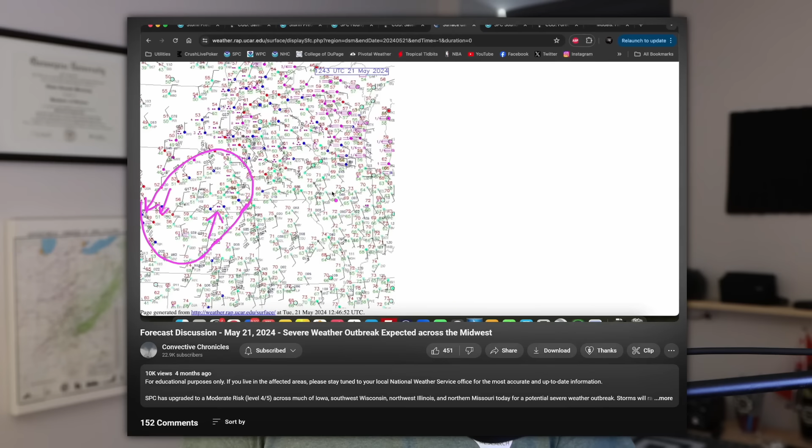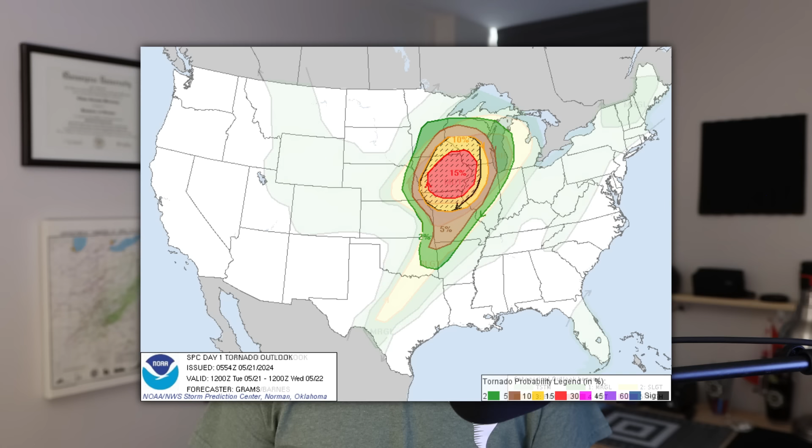However, it is important to note that the Storm Prediction Center did a great job forecasting this event. They implemented a moderate risk for severe weather, or a level 4 out of 5 for the region, driven by a 15% hatched probability for significant tornadoes. Ahead of the Greenfield, Iowa tornado, there were tornado watches in place, and the affected communities got advanced lead warning time tornado warnings.

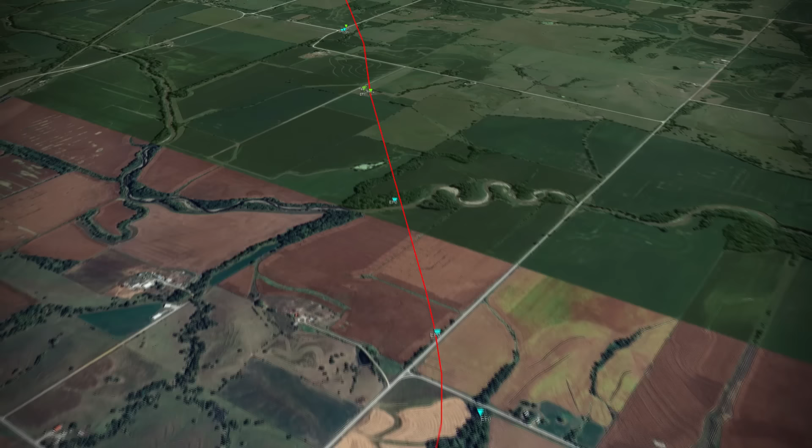To start off this damage analysis, we're going to get an overarching view of the tornado's path in order to get a quick summary of the tornado's life. The tornado touched down southwest of Nodaway, Iowa, while the Carbon, Iowa EF3 was occluding. The first several miles of this tornado produced low-end damage, with the first EF2 damage indicator occurring 14 miles into the tornado's life.

East of Carl, Iowa, the tornado would traverse through a wind farm, destroying multiple wind turbines, as well as several farmsteads along the way. The first EF4 damage instance would be 3 miles north of the town of Williamson, Iowa, in the form of a family residence.

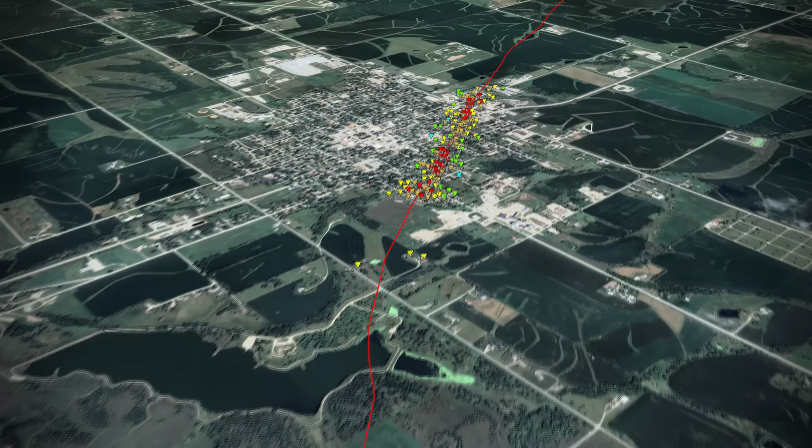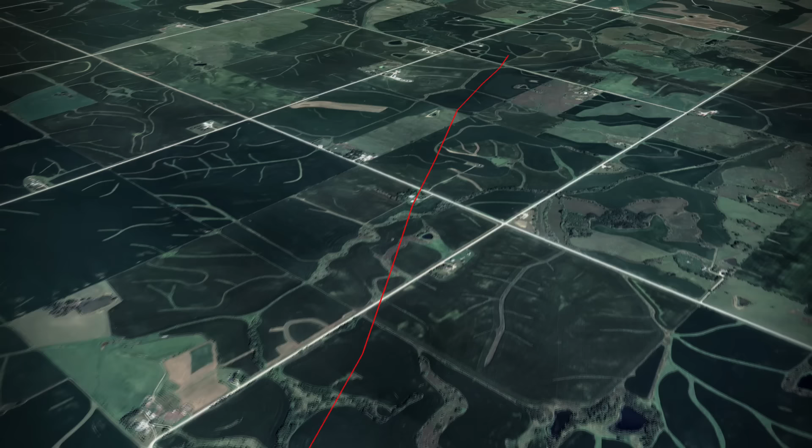Towards the end of the tornado's life, it would jog from its north-northeast original course into a northeasterly course, impacting the town of Greenfield. It would avoid the downtown part of town to the south, but there were still multiple residences in the path as well as small businesses, causing the bulk of the damage associated with this storm. The tornado would ultimately rope out just 3 miles past the town line of Greenfield.

I think it is important to note that the majority of this tornado's damage occurred at the end of the tornado's life while it was beginning to occlude. This is clear because the tornado had rapidly shrunk in width and deviated from the parent storm's motion. With that decrease in width, we have a conservation of angular momentum, where because of the shrinking diameter, the winds ultimately had to spin faster in order to conserve that angular momentum.

The first subject of this damage analysis is going to be the wind turbines that were ultimately impacted by this tornado, as I think they are a fascinating case to look at in terms of some interesting failure modes. This image here is one of the turbines that had ultimately been taken down by the tornado. Most of them failed in this fashion, and we're going to dive into exactly what type of failure this is.

Essentially, what ultimately happened is, as the tornado was traversing through this wind turbine farm, it was pushing over these wind turbines. But what ultimately failed in order to push these things over? As we can see at the base of the wind turbine here, it wasn't an anchoring failure.

Otherwise, the anchor bolts that are very beefy in the case of wind turbines, just because of the daily loads that these things need to take, those remained intact. But if we look further up, we notice a couple of breaking points within the tower of the wind turbine, and these are a result of a buckling failure.

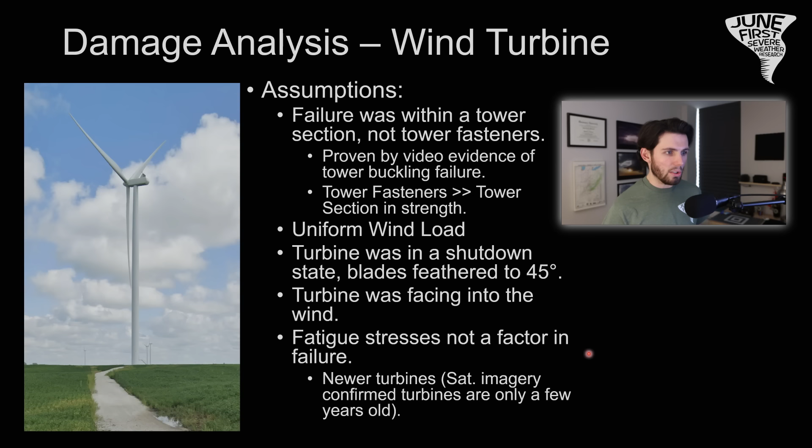And we're also going to assume that fatigue stresses were not already a factor in the failure. These are newer turbines based on satellite imagery, some of them only being a couple years old. So fatigue stresses are something that occur across the life of the turbine. And because these are such newer turbines, very early into their lifespan, they haven't had the constant wind loading of day-to-day use that would ultimately contribute to fatigue stresses, weakening them in the long run. So fatigue stresses are not going to be considered in this analysis.

Now, here are the geometries that we are going to need for this analysis. So we're going to have a lot of the different geometries of the tower itself, as well as some of the distances. So for example, the height of the hub, the length of the blades, width of the blades. All of these parameters are important in order to get the geometries correct to put them into our drag equations as well as our sum of moments equations. I was able to get the weight of the turbine from the data sheet as well as some of the material information of the tower support. Since the failure was within the tower itself, it was important to get the material properties of that tower in order to analyze its failure.

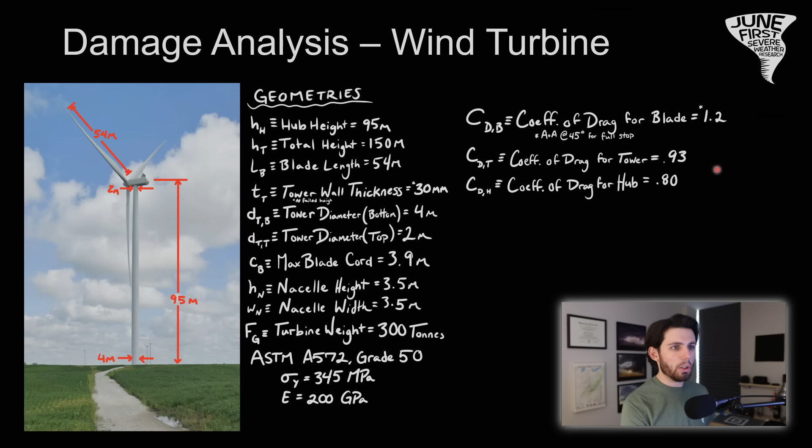Additionally, we got coefficients of drag for the different aspects of this wind turbine. So you have the hub drag coefficient, the drag of the tower itself, and then the drag coefficient of the blades. So how these turbines work is they have feathered blades. So depending on what is needed for power output, they feather the blades based on wind speed in order to get the max power output out of those turbines. And eventually when the wind speeds become too great for the turbine itself, you have to shut down the turbine to keep the turbine from basically exploding.

So what they do is the blades feather to a point where they can no longer produce lift. And when they do that, they produce a lot more drag. So even though the wind speeds are a lot higher beyond the operating parameters of the turbine itself, there's still a lot of drag being pushed on those turbine blades.

So that's why the coefficient of drag is so high on each of those turbine blades. Here are all of our forces on the turbine. So we have wind loads on each of the blades, as well as the tower and the hub. And then of course the weight weighing down on it and our reactionary forces at the base.

So ultimately what we can do here is create a resultant vector, because we're going to average out these three blade heights and just say that they're acting into the hub. So we'll have the three wind forces combined going into that 95 meter height in terms of our input into our moment equation.

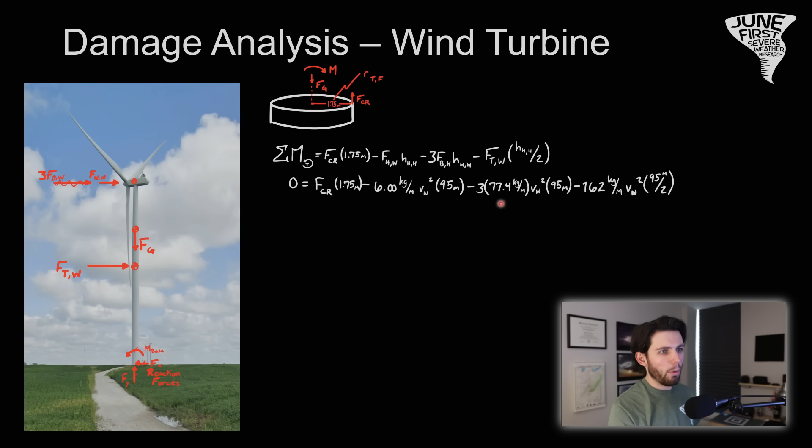But nonetheless, we have all of these terms filled out here, but we need to solve for that buckling force, right? So what we can do is use Euler's buckling equation, which accounts for the shape of the cross-section and how good it is at reducing the risk of a buckling failure. That's what this I term is. Then we have E, which is our modulus of elasticity, so basically the material property and how good it is at resisting those compressive loads.

Then we have a K factor here, which is basically the buckling end condition. Depending on how each end of our rod is constrained, you're going to have a different K factor. In the case of a turbine, you have an anchored end on one side, and the other end is free to move, which effectively doubles the effective length of the buckling condition. If it's pinned on either end, you only have the length of the column to work with, whereas if you have a little bit of flexibility at the top, you effectively double that length.

So we plug in all of our values here since we know all of that. Granted, the data sheets had everything in metric, so the calculations here are going to be in metric, but I'll convert it in the end to miles per hour. So ultimately, our critical buckling force, the criteria we need to hit in order to result in a buckling failure of this tower, is 4,670 kilonewtons. That is a lot of force, but nonetheless, what we do now is plug that into our greater moment equation.

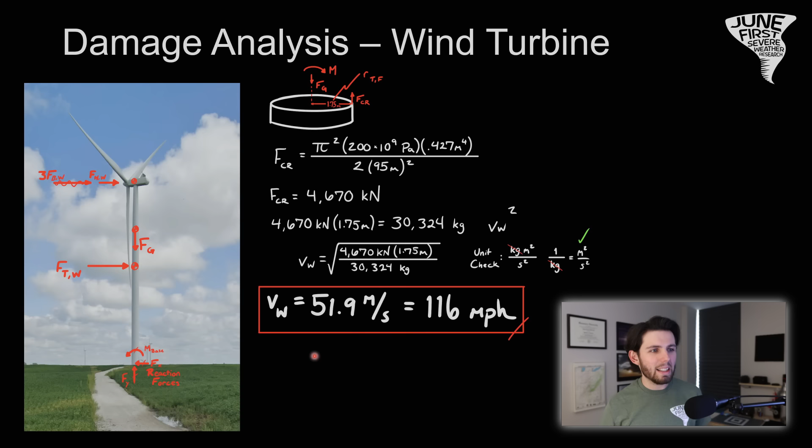This is very interesting because the ultimate final rating on these wind turbines was EF2 117 miles per hour. So it's kind of funny to see how scarily accurate we can get with a couple of hand calculations at the end of the day. Granted, we can get into much more depth when it comes to how these towers fail if we use something like an FEA software, or a finite element analysis software, where we basically plug this geometry into a giant supercomputer and make a bunch of little elements and see how all the stresses behave at different points in the structure. But that requires some very heavy computational power that I don't unfortunately have access to.

With that said, let's take a look at the sequence of failure events. So ultimately, the first failure is going to be a buckling failure in the middle of the turbine. So you basically get that compressive buckling failure on one side, and then as this thing starts swinging over, we get a secondary buckling failure closer to the base. So this bigger cross section, as this thing starts swinging over, there's going to be much more of a compressive load building up now as the moment arm keeps swinging further and further, and you have more leverage pushing down at the base of that column, and it results in that secondary buckling failure.

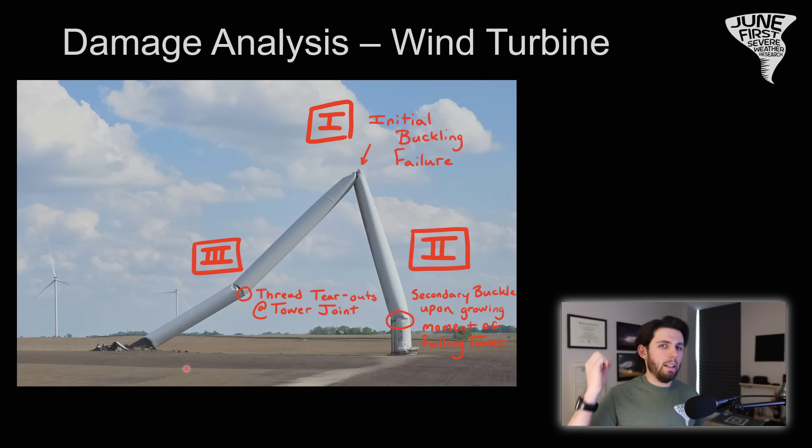And then finally here we have a thread tear out at the tower joint from when the turbine itself smashes into the ground. That big impact force is just going to shear all the threads out of the bolts in the joint of the two sections of the tower there. So very interesting combined failure here. And if you haven't seen the video from Reed Timmer of these towers falling over, you can actually see the sequence of events where they fail in the middle first, they buckle at the bottom, and then finally the turbine smashes into the ground and causes that final column section separation.

This next damage analysis subject was submitted to me on Twitter. I had asked people if there were specific things that they wanted me to look at when it comes to the Greenfield, Iowa tornado, and this is one of the ones that came up. This was from a garage on the southern edge of the core of the tornado as it was coming through Greenfield. It is a 2-post car lift garage, and what happened here is basically a concrete tear out from the concrete base of where this 2-post car lift was anchored into.

And granted, there were probably a lot of debris impacts here, and we're going to talk about that in the assumptions in a second, but I thought it would be really interesting to see, assuming debris wasn't the primary factor of failure, what wind speed would be needed in order to cause this thing to pull out of the ground? Here we have our assumptions. So for this analysis, we're assuming that there were no significant debris impacts. There likely were, given that there is a dent here in the joist cross member. However, there isn't a big sign of there being an impact on either of these columns, and nothing in terms of a paint transfer or anything like that up above that leads me to believe that something super significant hit this thing in order to pull it out of the ground. Given how uniformly it's pulled out of the ground, I think that wind load is a big contributing factor that ultimately caused the pullout failure of this car lift.

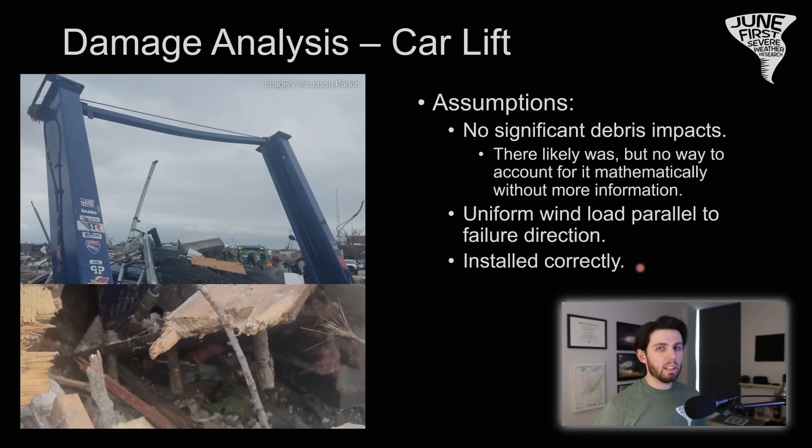And this thing could be significantly weaker if the concrete wasn't poured properly or this thing wasn't anchored into the concrete properly. There's a lot of things that go into that, as we'll get into in a second. Fortunately, I was able to find a user manual for this car lift and ultimately pull out a bunch of information in terms of geometries and the installation practices for this car lift. So that makes my job a heck of a lot easier in terms of not having to eyeball or guesstimate any of the dimensions here. We know exactly what's going on here and exactly how this thing was affixed into the ground.

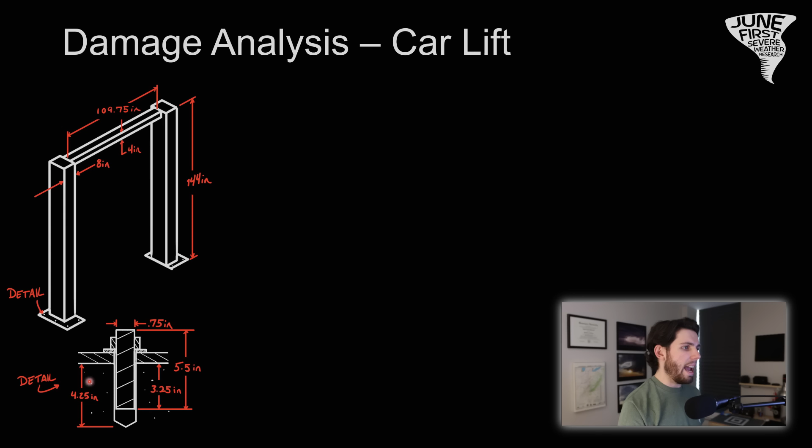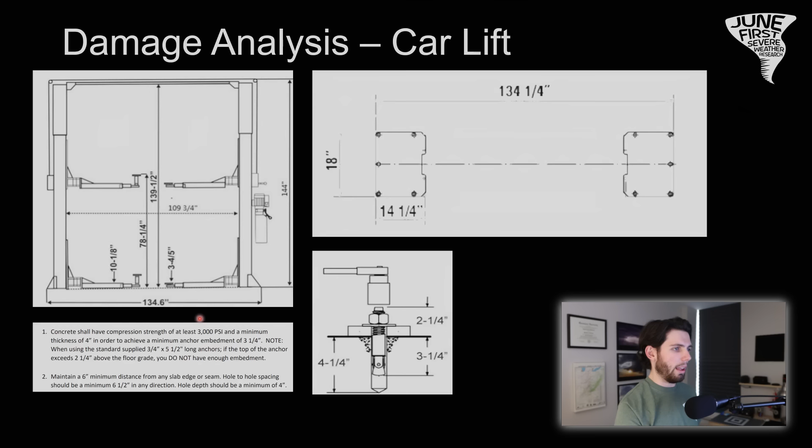So as we start adding our geometries and details in terms of the anchoring into the ground here, all of this stuff is extremely important. We can kind of nail home our geometries in terms of all of the widths and lengths in terms of moment arms, as well as all of the bolt engagement and distances needed in order to calculate how the failure occurred out of the concrete, including the material property of the concrete compressive strength of 3000 psi, which in the installation directions here, it said that the concrete base shall have a compression strength of at least 3000 psi and a thickness of 4 inches in order to have the proper installation depth and proper adherence to the standards in order to have this car lift safely used.

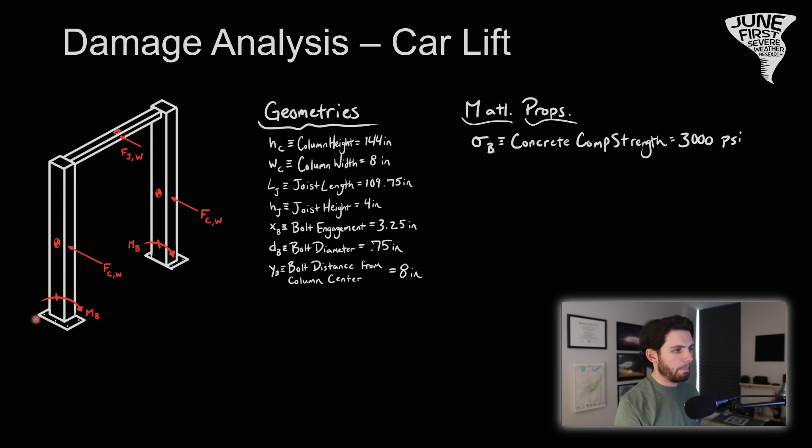So here are some of our forces at play. We're going to have each of the wind forces on the center of these columns, as well as on the center of the joist here that goes across connecting the two columns. And then we have the reactionary moments that the bolts are resisting against the wind loading. Here we are taking a look at concrete pullout, which is the main failure here ultimately that results in this car lift getting pushed over.

Concrete fails in a very interesting fashion. It's not like steel or any of these other traditional, more uniform style metal materials. Concrete is very good in compression, but very bad in tension and shear. And in the case of these concrete pullouts, we're looking at axial tensile failures of the concrete. And it doesn't fail in a straight line out. What ultimately happens is you get something called a fracture cone. So starting at the base of the anchoring point, you basically get a cone coming out of the fracture location. So as you pull axially on your anchoring bolt, the concrete is going to chip out in this kind of cone fashion outward.

Given the way concrete fails, we have special force equations to use in order to determine the concrete pullout failure. Ultimately, because the tensile load is so much weaker than the compressive load, we have to use this reduction factor with the square root of the compressive load failure to get an accurate representation of the strength in tension. Obviously, it is a much weaker number than that of the compressive load.

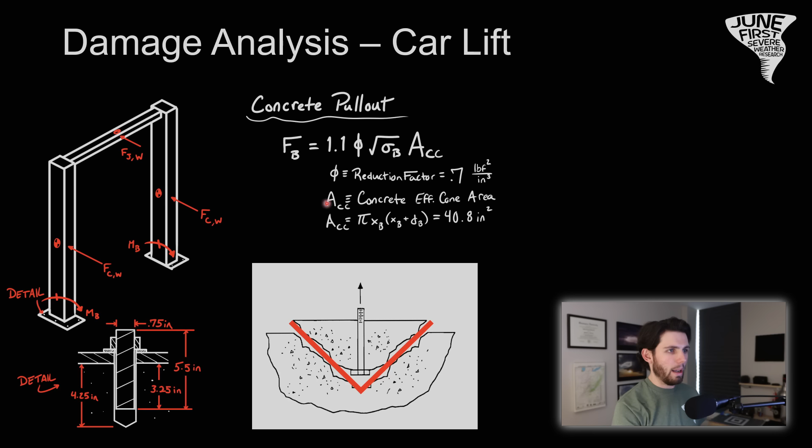Then we have the concrete effective cone area. So this is the amount of area that that cone is having to deal with that load. Basically, as stresses are distributed through the cone before failure, this is the effective area that the concrete has to work with in order to distribute that load as you're axially pulling on it. And then we solve for that effective area here within the equation.

If we take our bolt failure criteria and plug it into our sum of the moments equation, we ultimately have the two moments of the bases. So that's this 2MB term here. And then we have the moments from the two columns, from the wind forces on those two columns, and this center joist. So ultimately, if we look at the equation as a whole, we have the force of the wind on the two columns, so 2 times F times halfway up the column. So that's our moment arm there.

Then we have the central joist up here, which is the full height of the car lift, and then that force of drag from that central joist. And then we have finally our two moments about the bases of the column, which basically comprise the 5 bolts on each of the columns, the failure criteria of each of those bolts, and then the distance from the center of each of those columns.

So that gives you the moment arms on those ends that ultimately comprise this final bending moment equation. As we dive into it, like the wind turbine problem, we can solve for everything except for the velocity of the wind for both the column and the joist that goes across here. We have all of those terms available to us, the coefficient of drag, the density of air, the planform area that the wind sees, and we get these two terms just with V unknown.

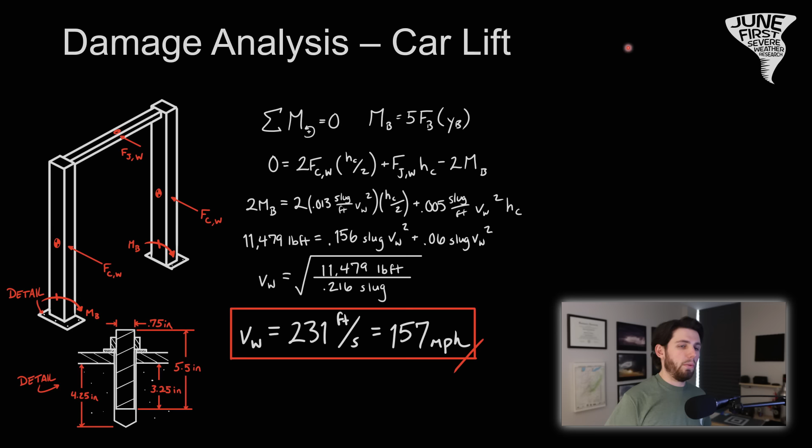We plug all of this information into our bending moments equation and start to isolate for V. We know all the terms except for V, so once again, we solve everything out, and assuming a purely wind-driven failure on this car lift, it would take a wind speed of 157 miles per hour in order to have concrete failures of those anchor bolts.

Like I said earlier, I do believe debris is a contributing factor in the failure here, and I think it's important that we note that this probably wasn't a perfect installation. There's a lot of things that have to go right in order to have a perfect installation into concrete. Granted, there's a lot of safety factors that go into play to ensure that even if there are some steps missed or the curing process wasn't perfect, the lift isn't going to fail catastrophically,

given that this is such an important piece of equipment to have very strict safety standards around, given that there are going to be people underneath heavy cars, and if that thing collapses, there are going to be people killed. So it's important to note that this thing is over-engineered to a point where it shouldn't fail. But nonetheless, one of the main things that sticks out to me is that there is no concrete really remaining on each of the anchor bolts.

That's likely because this was installed well after the concrete pad was poured, which is standard practice. You use a drill to drill out the concrete, and then you put in these anchor bolts and torque them down on top, and they bite into the concrete from the bottom. So I don't think there really should be concrete on those anchor bolts,

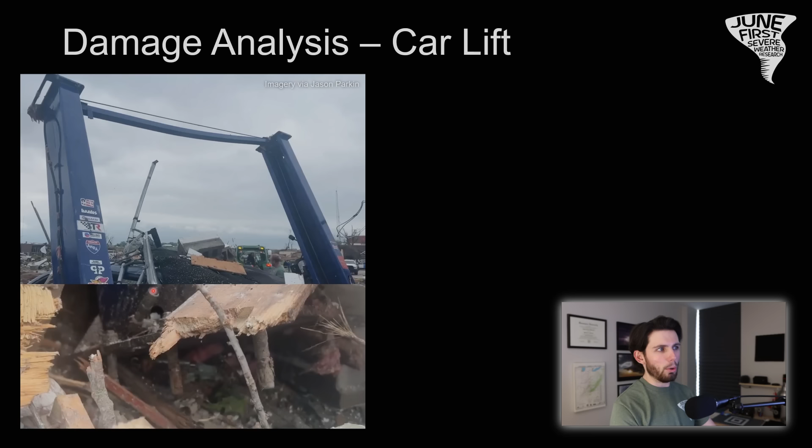but I think I would see a little bit more residue of some sort on these anchor bolts if there was a more permanent adherence to these bolts. And so something tells me that given the debris factor and the fact that there's no concrete on the bolts, this probably failed in less wind speed than what was calculated.

This next thing that we're going to analyze is a personal favorite of mine. This is something that we have seen before with other tornadoes, but this is the first time I've gotten the opportunity to really dive into one on a damage analysis stream. This one was submitted to me once again on Twitter, and this is a manhole that was sucked out of its hole in the path of the tornado.

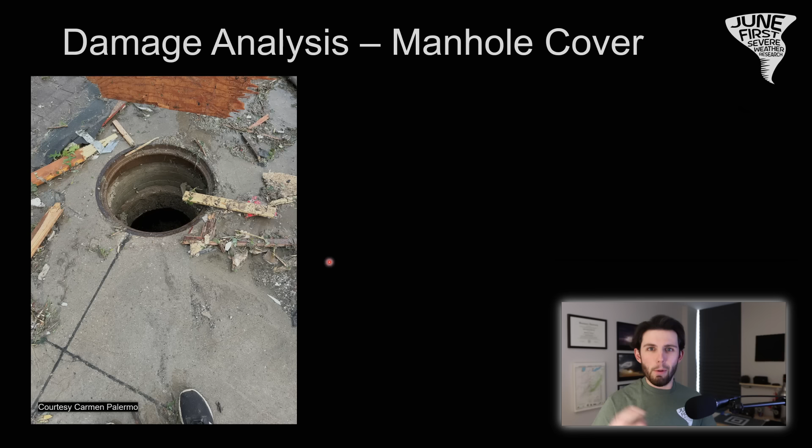This is a great illustrator of what is called Bernoulli's principle. Bernoulli's principle states that there is a relationship between a fluid's speed, pressure, as well as its potential energy. And in the case of this manhole cover, if you have a velocity increase on one side, you must have a pressure drop as well.

As we dive into it here, this is a 2-foot manhole cover with a 2-inch depth. So ultimately, what we can do with Bernoulli's here is get that final velocity based on the other knowns that we have. So within the sewer itself, there is no wind.

It's a velocity of 0. And ultimately, there are two forces at play. Because of the pressure differential of the speed of the wind on top, you're going to ultimately get a lifting force from the wind. And beneath it, you obviously have the weight due to gravity.

Here we have a number of terms that we need in order to solve for the weight and the wind force that is acting upon the cover here. So these three terms are important in order to get the weight of the cover. So we have the density of cast iron. These manhole covers are made from cast iron. Very heavy manhole covers. Obviously, they have to stay in the street and they can't come out. So that's why they're really heavy.

Then we have the gravitational acceleration constant, g, 32.2 feet per second squared. And then, of course, the volume of the cover, which we can get from just a simple cylindrical volume formula and the geometries that we already have at play. Then, of course, we have the area exposed to the wind, which is simply just the area of a circle. So we have to set our weight equal to the force of the uplift from the wind. We do that via the weight of our manhole cover, which we get ultimately to be 232 pounds force.

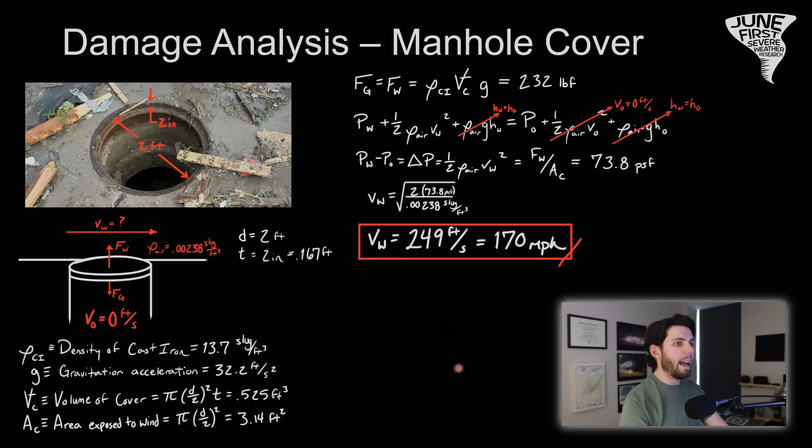And because we know that pressure differential, we can set that equal to our force due to the wind over the exposed area of the manhole cover, because at the end of the day, pressure is just force over area. And we plug in that weight as well as that area to get 73.8 pounds per square foot. So that is the pressure that needs to happen on that manhole cover in order to achieve that equilibrium. So we ultimately only have one variable left over that we need to solve for, which is that wind velocity. And when we do that, we get 249 feet per second, which comes out to 170 miles per hour.

The most important thing to note with this analysis here is that that wind speed is only what is needed to achieve equilibrium. So to get your force of the wind pulling it out equal to the force of the weight pulling it back down into the hole. So once you achieve that equilibrium, this thing is effectively neutrally balanced. You have to go faster than 170 miles per hour in order to create a force imbalance, in order to accelerate the manhole cover out of the hole.

The last thing we're going to look at for today's damage analysis is extremely intriguing to me, and I think goes to show just how powerful the wind speeds can be extremely low to the ground when it comes to the impacts of a subvortex or a very tightly wrapped core of a tornado. These are some parking stops in a parking lot that is across the street from an emergency room in Greenfield, Iowa. An important thing to note about this parking lot is that it is extremely new. It was built within the past year based on satellite imagery.

The most recent Google Earth satellite imagery up close for Greenfield, Iowa was in August of 2023, and this parking lot did not exist then. So at the time of this tornado, this parking lot was only a couple of months old at the most. As we take a look at these parking stops, they all exhibit a similar failure, whether it be one of the anchor points or both of the anchor points.

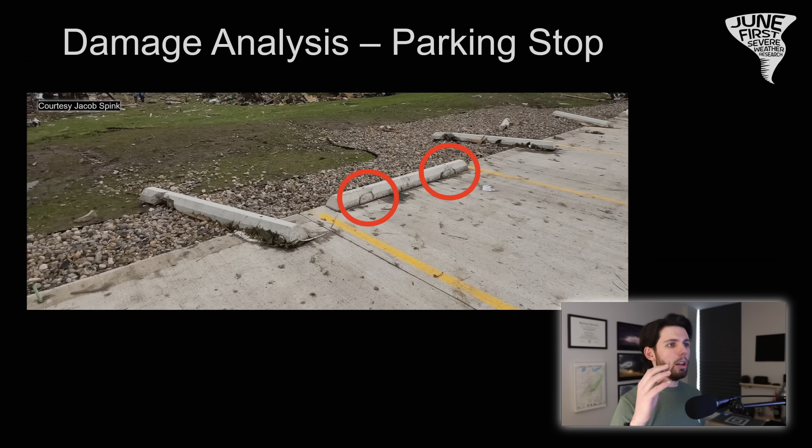Granted, debris impacts could be a case here, but because it occurred across all of these parking barriers almost uniformly, it makes me believe that it's a uniform wind load. If there was a debris impact, I think the failure of these parking stops would be much more catastrophic, and you would see almost smashed concrete barriers versus just simple tear-outs from their anchorings. You would see the thing smashed in half, smashed at the ends, XYZ, but you wouldn't see perfect tear-outs across all of these parking barriers.

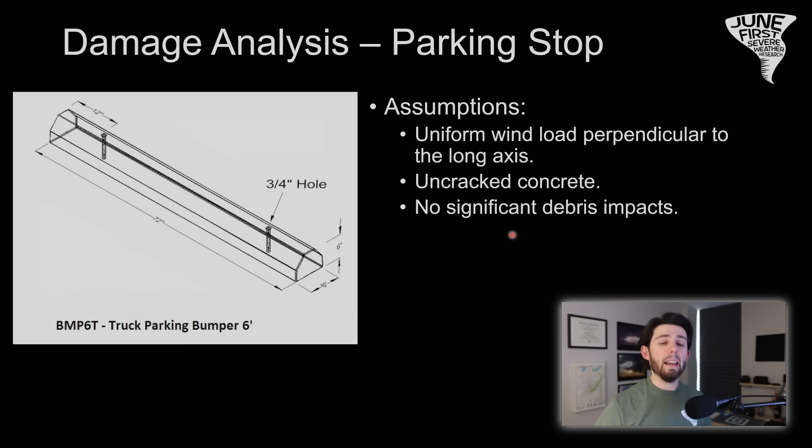So let's get into some of the assumptions. This is going to be assuming a uniform wind load perpendicular to the long axis, so it's going to be directly impacting the face of this parking stop. This is going to be treated as uncracked concrete, given the fact that they were so new and that there were no significant debris impacts based on the imagery provided. Here are our geometries as well as our concrete compressive strength again. And then this is our free body diagram, diagramming out our forces at play.

So obviously the big external force here is going to be the force due to the wind, but we also have a static friction force. Given this thing is sitting on the ground, there are a couple of anchors embedded into this thing, but at the same time, friction is still a factor that we need to consider. Just because it's anchored doesn't mean friction is not playing a role here. So we have that friction force combating it. We have the weight due to gravity of this thing, which is important to know for the friction force. And then we have the two, what we're calling tear out forces, because we ultimately know that's where the failure is going to be. Those are going to be the opposing forces via those two parking anchors.

We're going to be looking at this purely in the X direction, as those are the important dimensions at play in order to analyze this failure. So we have the force due to the wind, the two anchors, as well as the friction force. So the force of the wind is directly combating the two anchors and that friction force. Solving for the friction force, that's pretty simple. You just have your coefficient of static friction as well as the normal force, which in this case happens to be just the weight of this concrete parking stop.

The coefficient of static friction for the case of concrete on concrete is 0.8, and like I said, the normal force is just equal to our weight force. So we were able to get the weight of this concrete barrier from the data sheet, and it ultimately comes out to a friction force of 152 pounds force.

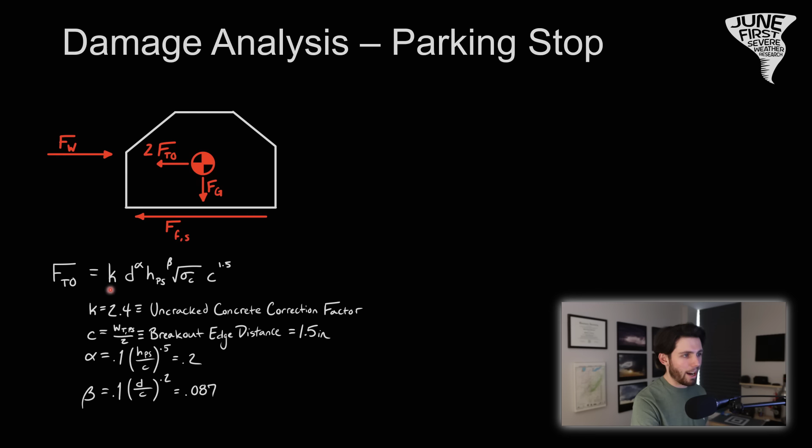So we solve for V, and we get a final answer of 414 feet per second, or 283 miles per hour. Now that is a very fast wind speed that sounds almost a little too unrealistic if you ask me. But if we go back into our equations again, let's look here. We have our K factor here, which is our uncracked concrete correction factor. So like I said at the beginning, this is assuming that this is an uncracked concrete condition.

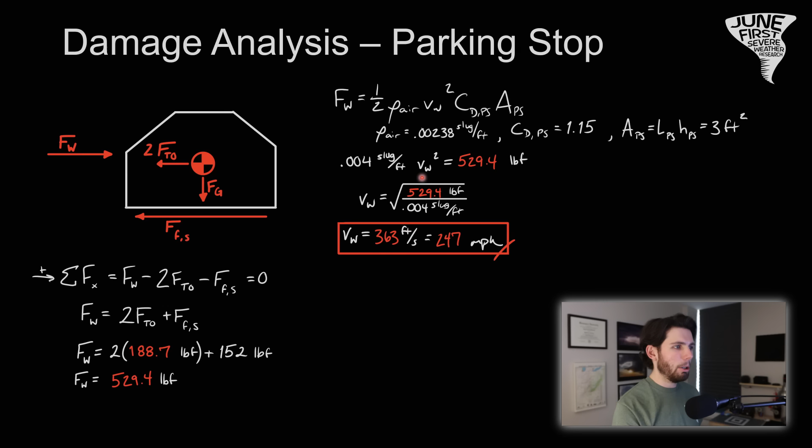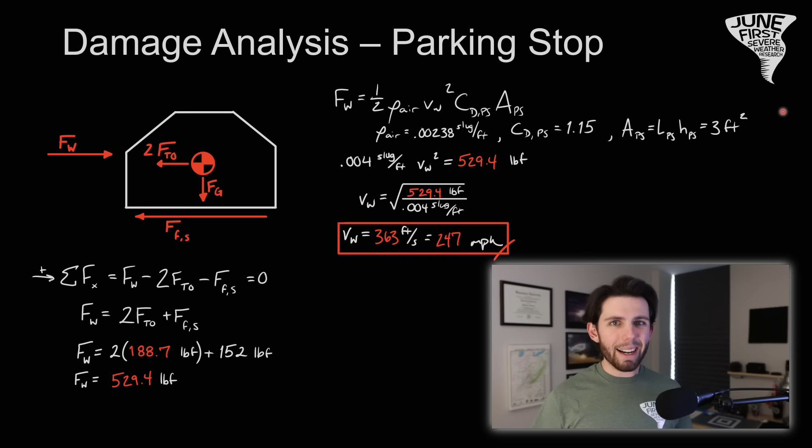Granted, there's another K factor we can use here. Instead, we can change that to a cracked concrete correction factor of 1.7, so slightly less, making the concrete even weaker than it already is. So if we plug that in, our tear out force comes down to 188.7 pounds force. We redo our equations again in the sum of forces in the X direction, as well as solving for V here, and we get 363 feet per second, or 247 miles per hour. So nonetheless, cracked concrete or uncracked concrete, this is an extremely fast wind speed.

Now, there are a number of things to consider here. There could be potential debris impacts that are further weakening it. There are inconsistencies in the concrete, allowing it to be weaker in general. But nonetheless, the fact that these tear-outs occurred universally across all of these parking barriers is extremely interesting to me, and it leads me to believe that there were wind speeds across all of these barriers here that were capable of doing this. If it was an isolated case, if it was just one parking barrier, then I could chalk it up to something like a debris impact. But in this case here, we can see 5 in a row parking barriers that all exhibited a concrete tear-out failure. This is kind of a smoking gun for me.

And if we zoom out real quick, things get even weirder, and it's hard to wrap your head around because tornadic debris damage analysis is so chaotic and it breaks conventional thinking sometimes. And that's what makes forensic tornado engineering so difficult, is that there are so many factors that contribute, and some of the things that we see are just so beyond our current understanding that it almost breaks our mind. Let's zoom out real quick with some drone footage.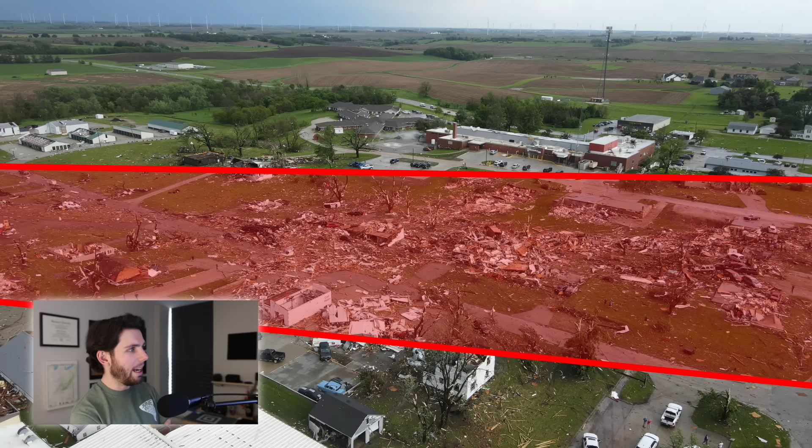Thanks to Chris Riske of High Risk Chris, he had some drone footage from right after the tornado and captured the parking lot in question in the footage. The main thing that I noticed is the gradient of the damage is extremely sharp, which leads me to believe that this was some serious vorticity stretching occurring at the end of this tornado's life, dramatically reducing the width of the tornado and increasing the velocity thanks to the conservation of angular momentum that we talked about earlier. But let's note some of the vehicles remaining in the parking lot.

If there are 200 plus mile per hour winds here, you would think that these vehicles would be lofted. But if we look just west of the parking lot, we see that we have an exploded house, this one over here earning an EF4 damage indicator thanks to its great construction. But nonetheless, the vehicles that were impacted were isolated to this half of the parking lot here.

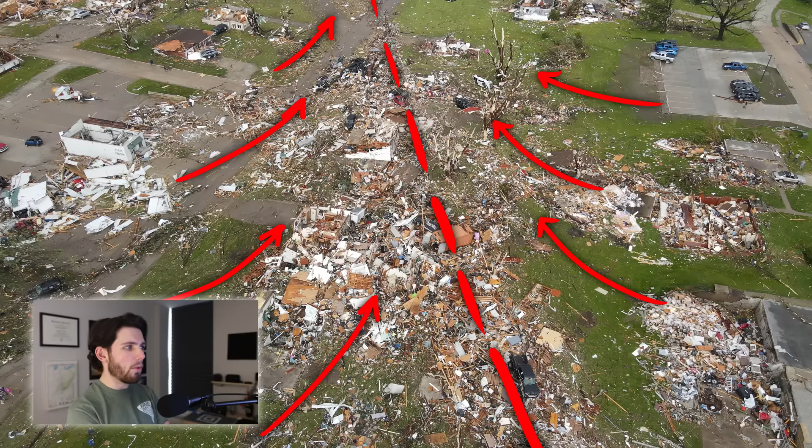Whereas if we look upstream a little bit, there are some randomly placed cars kind of in the backyards of the houses of the street to the north of this parking lot. While we cannot confirm that these cars came from the parking lot, I do think it's unusual that these vehicles are back over here if they had come from the street to the north here.

Now, the next thing you can point to are the rocks that are behind these concrete parking stops. And while most people might argue that those would be long gone if those types of wind speeds were exposed to this area, I think in this case, what happens is there is an extreme drag wake behind those parking stops that is shielding those rocks from those tornadic wind speeds.

And if we look where there were failures, you can see rocks that have been blown further upstream. With wind speeds that fast, I think the drag wakes are going to extend multiple feet behind, and it is really shielding those rocks from being subjected to wind loads at that low of a level.

I think given the extremely sharp gradient that we're seeing with that hospital across the street there virtually being untouched and cars in the parking lot, you can almost draw a perfect line to where there was extreme damage versus almost EF0, EF1 type damage.

I think this could have been the result of a really strong inflow jet or something along those lines associated with a suction vortex blasting that northwest corner of the parking lot with such extreme winds at such fast rate that it simply just eroded away those parking blocks and took the cars that were there with it. Like I said, we can't prove that those cars came from the parking lot, but just based on what we're seeing here, that would make sense in my eyes.

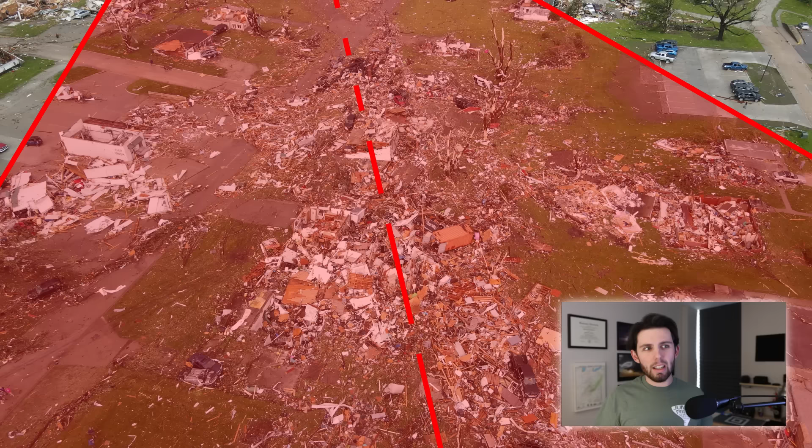It's a stretch to conclude that, but at the same time too, I think given the fact that we saw multiple of these concrete parking stops failed in this fashion, leads me to believe that universal wind loads were applied to all of them, and we can't simply just chalk it up to debris impacts.

With all of that said, this brings in the conclusion to this damage analysis of the Greenfield, Iowa EF4 Tornado. I think it goes without question to say that this was an extremely violent tornado and ultimately might have been the strongest of 2024, at least thus far, assuming nothing happens in the next couple months. Given some of the non-traditional DIs involved here, as well as the findings from the Doppler on Wheels program, I think this is without question a tornado capable of EF5 damage.

But of course, as mentioned before, the limitations of the EF scale are going to prevent it from earning an EF5 rating at the end of the day. I think if there is a modified EF scale or something along those lines, Greenfield would ultimately fall into an EF5 category in my estimation.

I think maybe one of the biggest takeaways here is the craziness of vorticity stretching. Remember that this tornado at its peak width was almost a mile wide, and by the time it reached Greenfield, it was only a couple of blocks wide. So that angular momentum really just ramped up the intensity of this tornado at the worst possible timing when it comes to the residents of Greenfield.